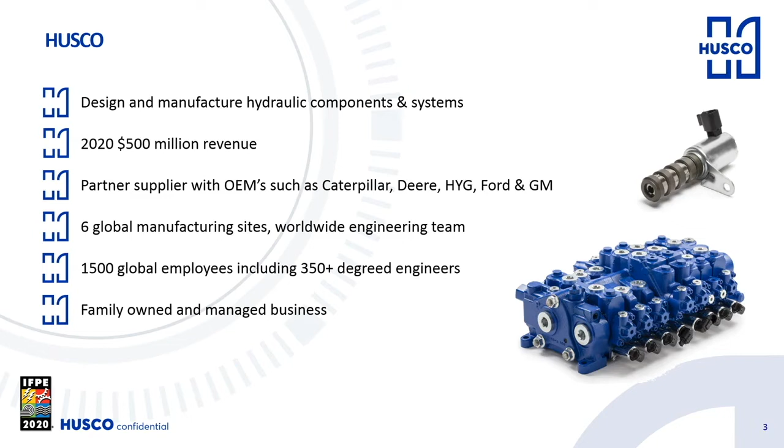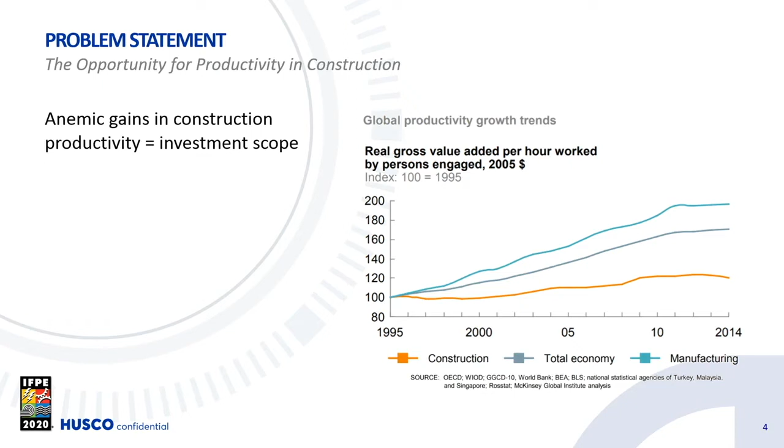The problem statement that we're faced with, as many people at this whole conference in here and outside in the lots will know, there really have been anemic gains in construction productivity. So the orange line along the bottom, that is construction. The midway line is the total economy, and the top line is manufacturing. So manufacturing made a lot of gains in productivity, and you can imagine it when you see robotics coming in, automation. We use it within our manufacturing. You see this live. For construction, for various different reasons that a lot of us know about, and I'll talk about a few, there's been really small gains in productivity.

A couple of those reasons. So the reduction in skilled labor. This is a global problem now. It used to be specific areas, but again, you talk to the guys outside, getting the availability of good, reasonably priced skilled labor. It's a challenge, a real challenge.

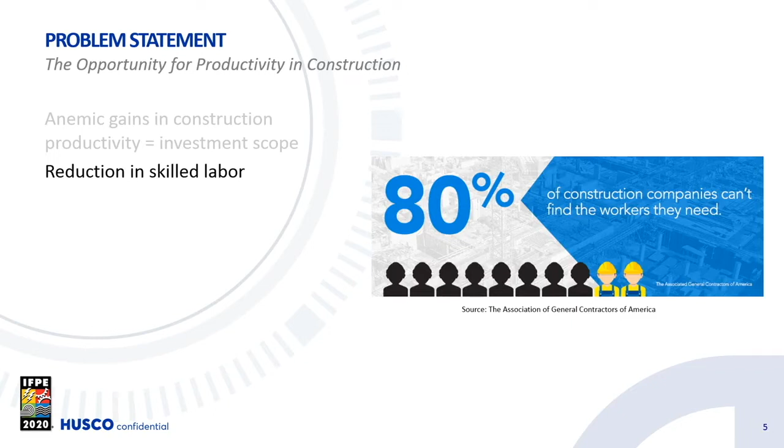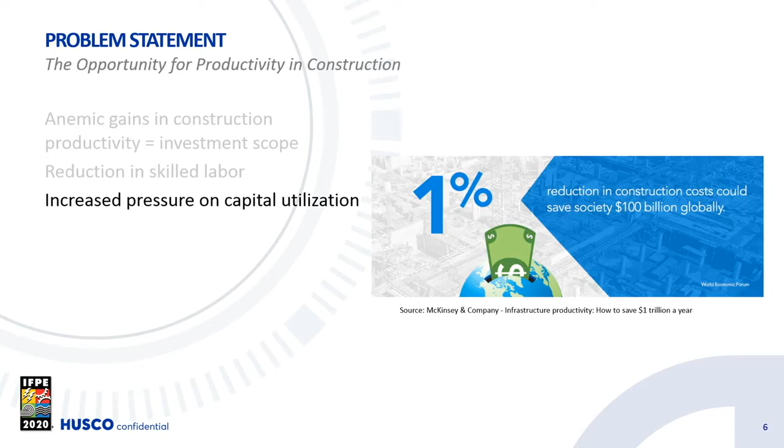Increased pressure on capital utilization. These are very big macroeconomic figures, but a 1% increase in productivity would be a $100 billion global annual saving to the construction industry. So very small gains will have very big effects, such is the size of the construction industry. Those are the negatives.

The positives. There's a lot greater acceptance of technology on the work site. Whether we blame the iPhone for bringing together many technologies into one very easy user interface, in general there is a lot more acceptance. Again, very macroeconomic figures, but we all know that robotics and drone use for surveying can save time and improve safety by doing remote surveying. There's a lot more acceptance and a lot more demand from the end users for these features in their systems.

Husco has a bit of history in this. On the motor grader, we used to have a mechanical valve doing the blade tip control. And then we found out that the Topcon, Trimble, Leicas of this world were putting a whole EH valve on top of our valve just to get the blade control, because they wanted to automate it. If you could make that machine go from 3 miles an hour to 6 miles an hour, and if you could save one pass because of automatic blade adjustment, that's worth a lot of dollars, whichever currency you want to use. And they were spending a lot of money putting these kits on top of ours.

Exactly the same story with bulldozers: a slightly different machine form, a slightly larger valve. So where Husco has become very successful is when the OEMs have made the change from a mechanical or pilot system to an electro-hydraulic system. Husco has been there picking up business because of the knowledge of the components we make in-house, from the small cartridges through to the main control valve systems, bringing all of that knowledge together in one place.

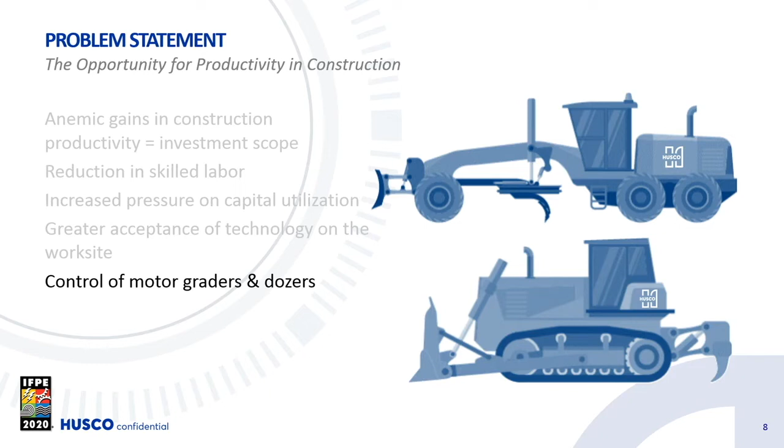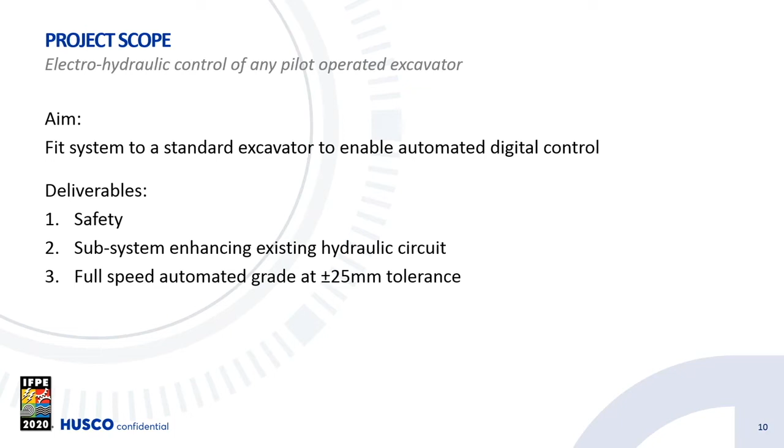The project scope: fit a system within a standard excavator to enable digital control of the machine. The deliverables: safety is number one; we are never going to be in business with an unsafe system. We have to integrate with the existing hydraulic circuit. We can't take out the main control valve and joysticks and put in all new stuff. That isn't realistic, that's a science project, and Husco has not got to where it is by doing science projects. Performance: we wanted full speed automated grade, using 100% of the machine's available velocity at a precise grade, a flat grade at plus or minus 25 millimeter tolerance. That was our performance target.

The machine was a rental, 4 years old, 4,000 hours, so it has had a hard life. It was a little bit rattly, and we had to fix a few things to start with. It's a negative control hydraulic system. It's a really good representation of the standard excavator out in the market today. Currently, probably 95% of all excavators in the 15 to 70 ton range have a pilot operated system, either negative or positive control. There aren't many EH systems out there today, so this is a really good representation to do the project on.

The path planning. I mentioned the acceptance of automated features, certainly within the manufacturing market. And there is a lot of research around robotic control and how you develop autonomous systems. So we didn't need to create that from the start.

The knowledge is already out there, the G code that's used to program robots, but they have servo-operated arms that, when you say I want to go at this velocity or this speed and I want to get to this point, they get there. They have one motor or one power source per effector, which is going to guarantee it gets there, which is very easy from a geometric point of view. The excavator is not like that.

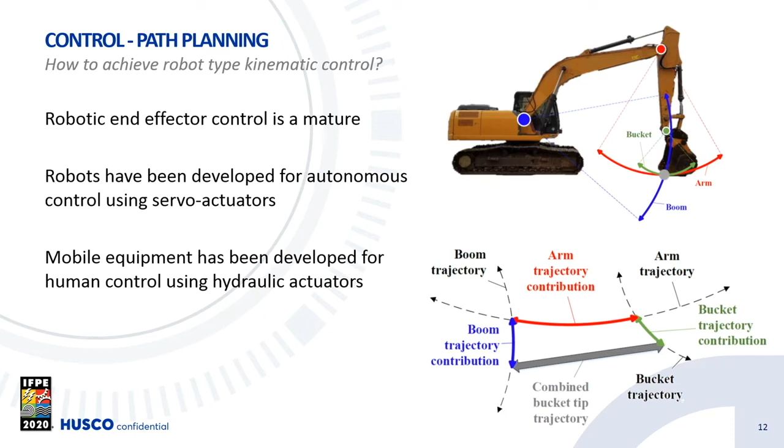So when you're doing the path planning and doing the control, these are the elements that have to go in there. And it's what has made this challenge so far from using, say, the code that operates a robot to the performance you get from an excavator. This is one of the reasons why it's become so difficult.

And what you get is the human being that's driving these machines, they're a big compensator. They're commanding because they know they've got these very good analog controllers at the end of their arms linked to the joysticks. They know what they want, but they are always over-commanding what that machine can do. You never have a pump, an engine, and a system big enough to command what the operator wants, either through a single service or multiple services, like I mentioned with the 3 working at once.

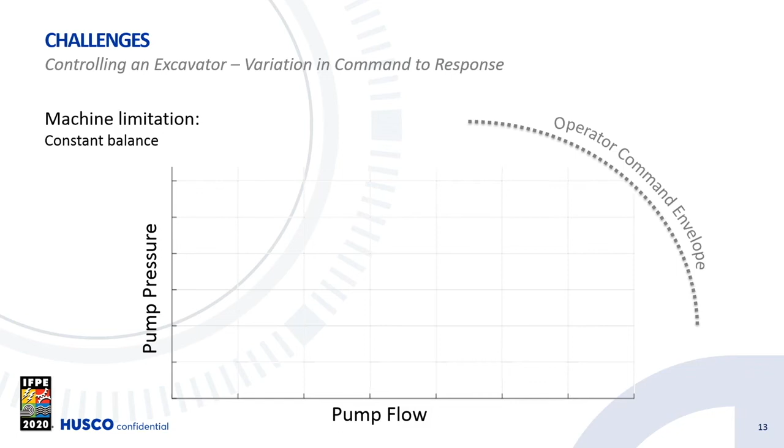This is what the map looks like. So in red we have pump 2, and in blue we have pump 1. And these are the exact maps that are going on during that grade. Nearly all of these systems are 2-pump systems. If you go onto the smaller excavators, they're 3-pump systems, but you see a very similar map.

And what's interesting that you can see along all of this, it's still a long way from where the operator command is. So that balance, that compensation that's going on, all of that balance is going on by the operator. It is the operator completing that movement. It's not a mechanical one or a software one.

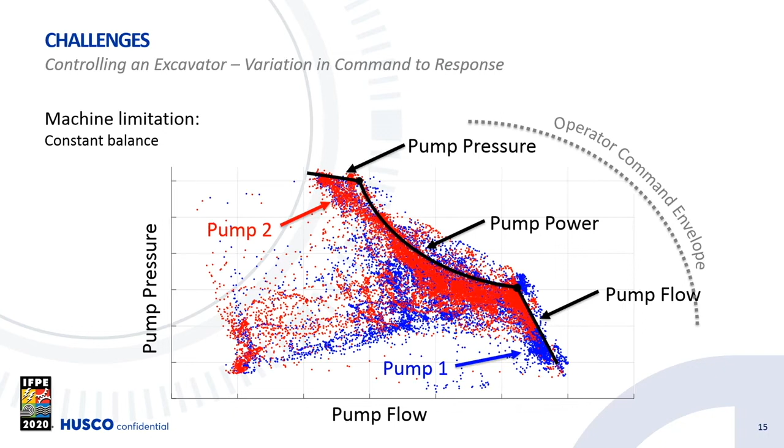Because we know hydraulics, we know the systems, we know that top line there, that is your pump pressure limit. The curve you see, that's pump power, which is proportional to the engine and the torque that you have in your engine. And then at the bottom, that is your pump flow, the maximum from those pumps. So all of these items are getting balanced at once by that skilled operator, of which there are fewer in the world.

So with the 2-pump system that you have on here, all of this balance has to be done by the operator, and that has taken probably 20 to 30 years of tuning of the system to be able to get an operator to do this performance. We then had to overlay it with software or a digital interface so that we could bring in our extra functions.

Another challenge is the speed in which you can control it. So in the top graph, we have the amplitude versus the frequency. The diamonds you see along there, that's the natural frequency of the different elements of the excavator. This is logarithmic, so the whole machine sits at around 1 hertz, the boom 2, the arm at about 5 or 6, and the bucket out to about 9 hertz. So that's the natural frequency of those elements.

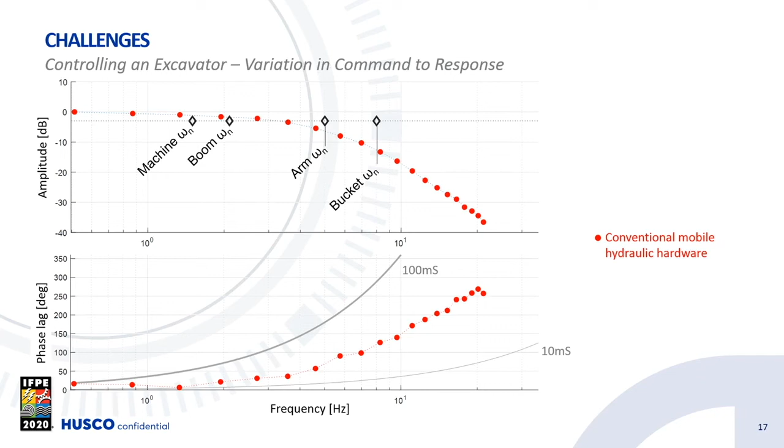The other element, on the lower graph, is our reaction speed. The dots that you see going along the bottom, that is the latency. So how quick we can react. Again, in the human system, your brain is part of the system and you have very, very fast latencies to be able to react to what you see. We have to exceed those to be able to over-command the system. So that's just a review, and that's with a standard hydraulic system fitted to any excavator today.

So the system we have, we named EXACTO. To start with, it was a 3-function system, so it could control boom, arm, and bucket. Safety is absolutely paramount. Any failure, any electrical breakdown, the system has to switch back to operator control only. That's the only way you can do a safe system. We have pressure sensors on the operator side, so we're listening to what the operator is commanding, and on the main control valve side, so that we know whatever signal we're giving to the main control valve is what's being achieved. That's really important for closing the loop.

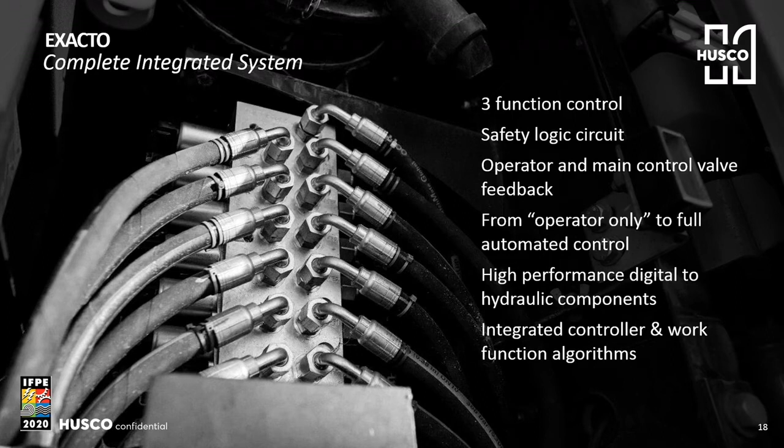We have various different modes, operator only or fully automated control, so that we can either control it or some other party can control the machine. We have all our own components. We'd be a little bit stupid if we built our own system and didn't use Husco's own high-performance controllers and components. And then we had an integrated controller and our work function algorithms. So these were all the elements that we had to put into this system to get the desired results we wanted. It's important to know where we fit into the machine control landscape.

As you can see from some of the work we've done, we have certain elements, certain path planning, we have a machine. For Husco, that is not the value case for us. But to prove our system did what it could do and how we could really prove our performance, we had to combine all these systems.

So from the start of machine control, you have the input, either a user saying, I want to be 1 foot low and I want to come in, or you have a site plan or a BIM system that tells you where that end effector needs to go. That needs to report to a machine interface to tell the operator what's going on, and that needs to go into some form of automation controller that's going to define where all these functions need to be, where all these different boom, arm, and bucket, it needs to tell it where it's going to be.

Then it goes into what we call our EXACTO system, so we can convert that need from the digital side of this map into the hydraulic side. We then control the main control valve with the precision that's required, and then it goes out to the end effector. To close the loop, you need to know exactly where the end effector is in space. And that's where there's IMUs or GPS systems out there to bring that back to the automation controller to say, you said I should be here. Am I there? And if not, what do I need to do to get there? So there was already a closed loop on the complete system.

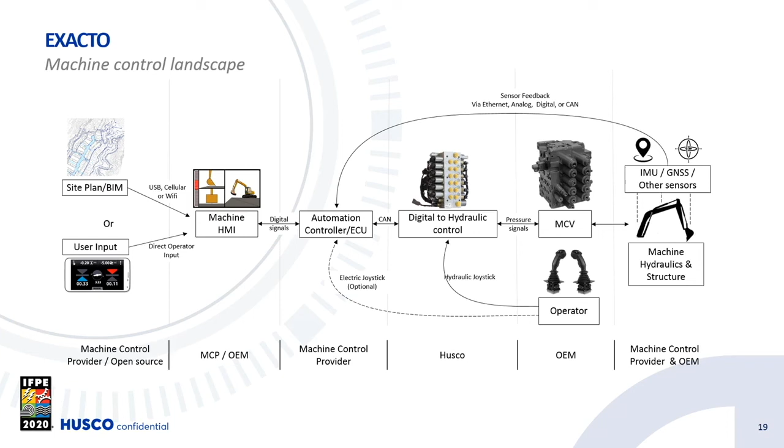For our test work, you'll see it in some of the videos, we did not use IMUs, we used string pots, just because of the speed of reaction, and it's what we had available. There's lots of companies that do very good IMUs out there. Again, that is not Husco's value play. So in this whole landscape, Husco are only looking at a very small part of that, but it's also a very key part to be able to give this digital interface to the various providers to get the control of that system.

So the exciting bit, apart from the video and the beer, obviously, are the results. So in blue, you see the EXACTO system, and all these results are directly from the spool within the main control valve. Apologies, I didn't mention that before. So exactly when we command that spool is when oil starts moving towards that end service, which is where we need to operate. So you can see with the EXACTO system, we were able to push out past the natural frequency of all of the different elements, ensuring that we had the required amplitude for total control past the bucket, which has the fastest natural frequency.

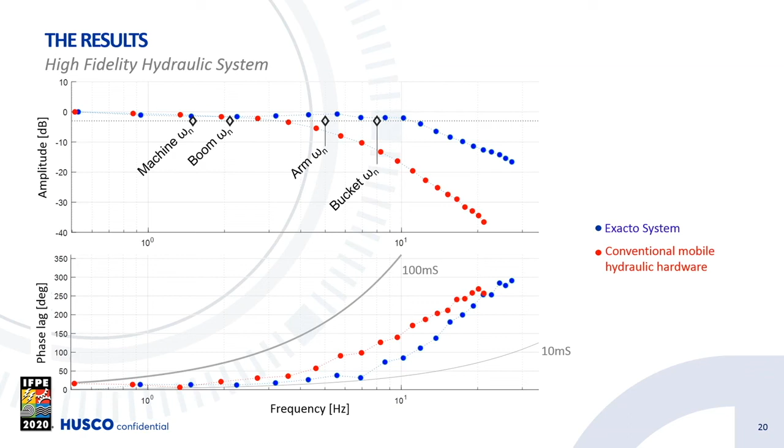Also on the lower graph, you see, although not a huge step change, there was an improvement in the latency of the system. And more importantly, it was pushed further past so that we could get the latency at a lot faster position past the total natural frequency of the machine. And that was part of what our aim was for the system.

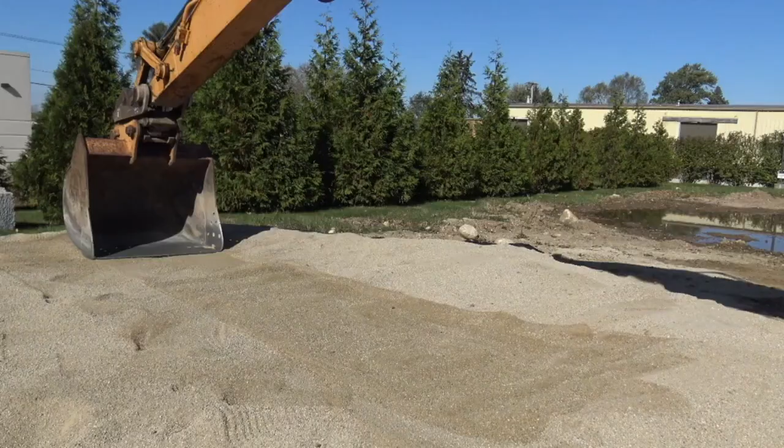So we have just a flat grade programmed in, and you can see here all the different elements. And the boom goes up, and then it has to come down. The bucket does not move much. Of course, as you've seen from the graph, that's the one with the highest natural frequency.

He did a good job there and didn't show us his hand, which is good.

And so there you can see the grade. And this, from what we see out in the market, is a competitive system because of how we were able to integrate with the system.

What the results look like that we've recorded off the machine. So the top one, that is the pressure. Obviously, we're working in a pressure world with the EXACTO system that was on there. So the solid line is the command. So this is what we want to achieve. The dashed line is the actual pilot. So that's what we did achieve. So we run pretty good.

We're running almost line on line, which is great, all until you see this dip that goes down and everything gets a little bit out of shape before it catches itself back up. That is, as you imagine here, sorry for the people that are just listening, that is when the boom goes up and then the boom comes down.

We call it the over-center moment. This is really difficult to control, and you're moving your high pressure side from one side of the cylinder to the other. This is a really difficult place, and we've been doing a lot of work in this area in future iterations after this project, but for a first attempt, we were pretty pleased with this.

The next graph is the velocity, so the speed of what was happening. And this is how I mentioned when you saw the graphic working, the various speeds across a whole range that you have to deal with. This is a 5 meter grade. The various different speeds, the boom, how it goes into the plus and then it goes over center. It actually goes into a minus, the direction in which it goes. These are the balances that you're having to do. And again, we just had a little problem around this over-center moment, but we were still pretty pleased with those results.

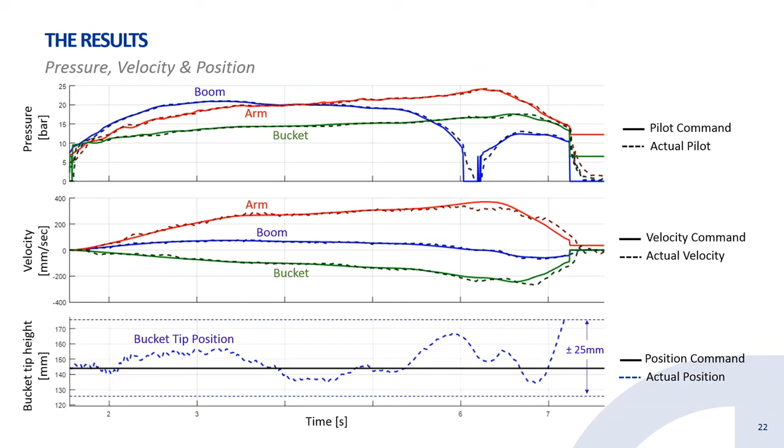The next one is the really important one. I can tell you the pressures are perfect, but if the grade looks terrible, you're going to tell me it's worth junk. So the bottom one is where the actual bucket tip position is. Our target was plus minus 25 millimeters across the whole grade. And by and large, we got there. Particularly the first 70% is actually plus minus 10 millimeters, which we're really pleased with. When we then come to this over center, we have a bit of a wobble, and then at the very end, it just lifts out. Again, the geometry really plays against you. But for the working position, we were really pleased with the results that we had in this area.

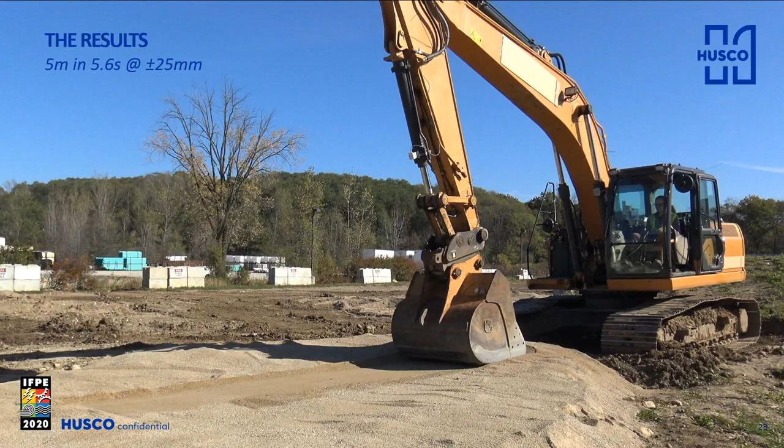So the headline, we had a 5 meter grade, the total grade of the excavator available, in 5.6 seconds. Our target was to be at 100% of the velocity available of that machine, the best that machine could achieve with the best operator pulling the sticks as fast as possible. 5.6 seconds is just over 90% available from the machine. There's 2 reasons for that. One is we needed a little bit more time to tune it. And we actually had to slow it down a little bit at the start and at the end because it was a bit jerky to start with if we gave it 100% command straight away. And at the end, it clattered into the machine a little bit and quite close to the operator. So we had to slow those down a little bit. But still, 90%, we were pleased with that one.

So next steps for us is refine the system performance. We know where there's some challenges, particularly in that over-center movement. Apply some automated commissioning. So this worked really well on this machine. What happens when you put it on a bigger machine, a smaller machine, a machine with a longer boom, all of the various things out there? We need to create a system that doesn't take a month to tune for each one. Again, that is not a viable system to go out into the market. So do we need to do any automated commissioning? That would be an interesting one to think about.